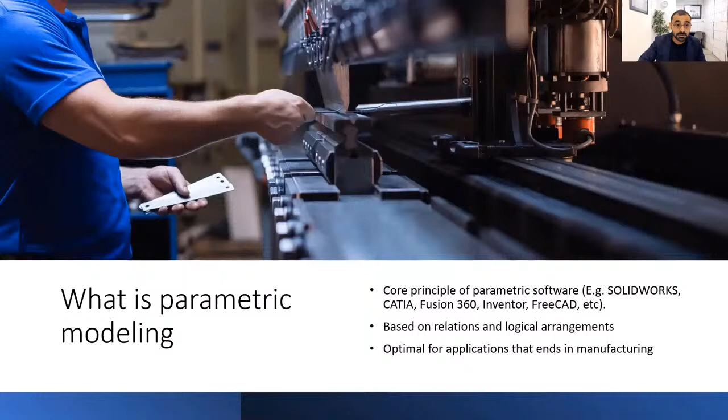And I know in this slide I haven't defined parametric modeling as much, and I find it easier for people to get what that is if we do a mental exercise. So let's do a mental exercise together. You don't need papers, you don't need a computer software, you don't need anything. You can just imagine the situation right here. And this exercise is about a square that will eventually turn into a cube.

We have one in the chat: Rhino 3D is another software with parametric capabilities. Yes, Rhino 3D is also a big software in the field at the moment.

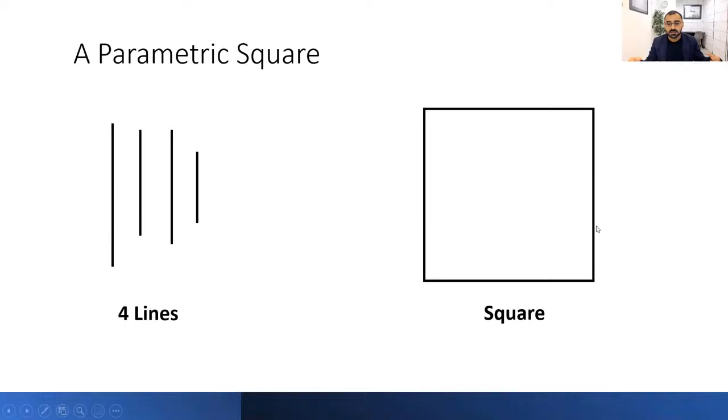So we have 4 lines, and those 4 lines can turn into a square. This is something quite simple, and if we have been fortunate enough to go to school, either elementary school, secondary school or high school, we know that because we did geometry there. However, if you're talking about parametric modeling, especially from a software perspective, there is much more depth into that principle of a square. So let's dig into that a little bit deeper, and we can end up with something that looks like this.

A parametric square is a square defined by parameters. And those parameters are dimensions and geometric relations. So here we have a merged relation between each end of two lines. Those two lines here have a right angle. Those other two lines have equal lengths. Those other two lines have another right angle. Those are all geometric relations. And then we have a specified length as well, in this case 1 millimeter. So this is basically a 1 millimeter square defined by different parameters, which are geometric relations.

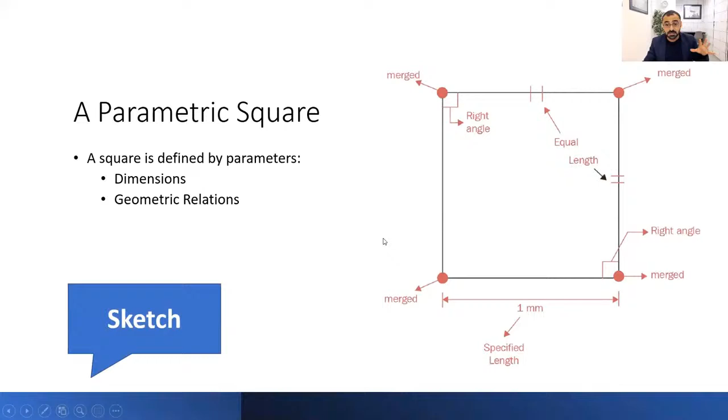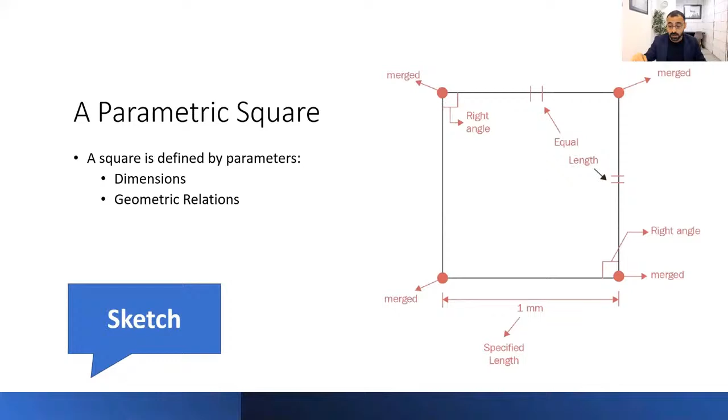If we move one step further, we can turn that square into a parametric cube. But before that, we can call this square a sketch. This is a 2D thing, a parametric sketch of a square. If we take that sketch, flip it on its side, and extrude it upward to a certain length, we end up with a parametric cube. And again, we have another geometric relation here: the length of the extrusion is equal to the length of the side.

Now, again, we are human beings and we're smart. And when I describe that cube, your response might be something like, well, okay, we all know that it is by default a cube. And if you think that, then yes, you are correct.

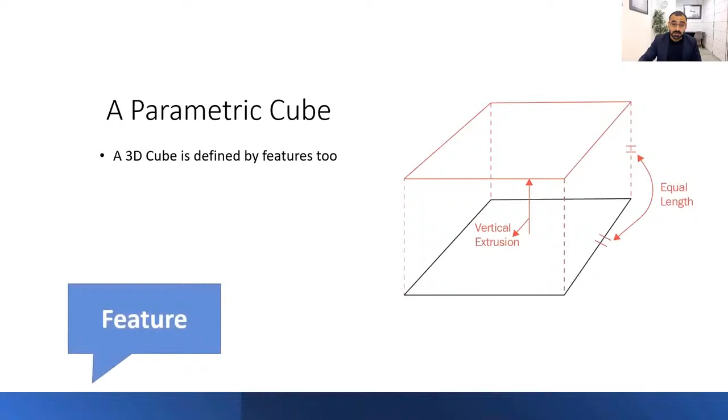However, what we are dealing with, especially when we're doing parametric 3D modeling in a software, is we are talking to a robot. And robots are not very smart to understand what we want or what we mean by shapes, because unfortunately, at least for now, robots didn't go with us to study geometry. This is one of the things, if you're getting started with parametric modeling, keep in mind that you are talking to a robot. And the biggest issue I see with people who are learning, especially starting to learn a parametric modeling software, is they kind of lose the concept that you are talking to a sort of robot.

And because you're talking to a robot, you really need to tell the robot every single parameter you are thinking of. You have two lines. Well, you want those two lines to be parallel to each other, then you have to say that. You want those two lines to be perpendicular to each other, then you have to say that. You want the end of two lines to be merged with each other, then you have to say that. You cannot just assume that by sketching a square or sketching a few lines.

Now, another question at this point would probably be, okay, so we worked hard to define those parameters, and we ended up with a cube. But why should we go over the hassle? I can go to Microsoft Paint, and I can draw a few lines, and I can end up with a cube without having to worry about defining those parameters. Probably going to be in a faster time as well, or I can sketch by hand, and that'll be faster as well.

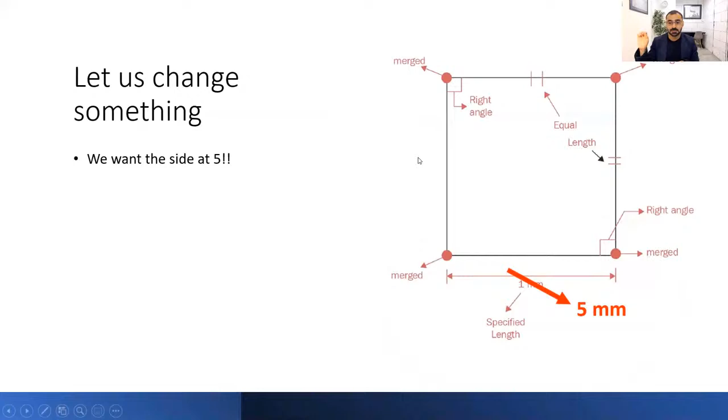However, that's not the case with parametric modeling, because in parametric modeling, we have defined every single relation. We have defined how every single line, how every single point will interact with each other. Then we can simply go back to our original sketch that we did with a 1 millimeter side, and scrap that 1 millimeter, type in 5 millimeter, click enter, and all of a sudden the whole cube changes from a 1 millimeter cube to a 5 millimeter cube.

Now, a cube is a very simple example that we're talking about, but that goes with everything else. So I have this water bottle right here. This water bottle has a diameter for the cap. A lot of times in the design process, you're going to have a diameter of maybe 10 millimeters, and then you're going to realize that, oh no, 10 millimeters may be too small, and then you're going to change it to 11, maybe change it after that to 12, and then change it to 13, and we're going to keep changing every parameter of the design.

Going back to a very fundamental design principle, design is circular. So every product you see around you, if you go to the background of this, there has most likely been a lot of modification in the design itself. You design it with specific parameters, and then you do a little bit of change. You change the height, you change the diameters, you change the thickness, you change everything. And then you keep prototyping and you keep experimenting. And that goes back to a fundamental design principle, which is design is circular.

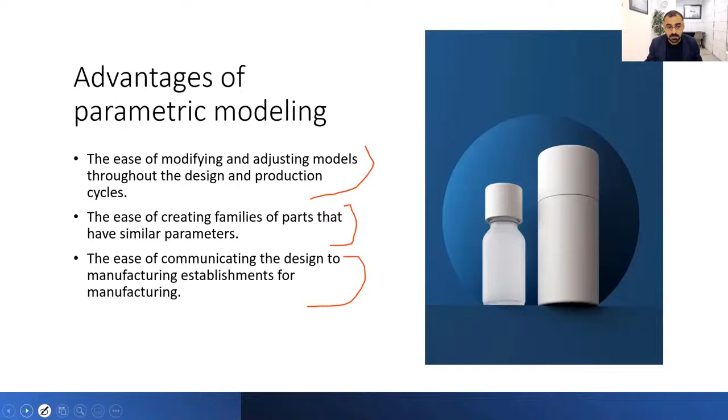So this is about parametric modeling in general. Now let's talk about software. Because parametric modeling made those things easier, software saw a market in this and came to adapt to those needs. So now software has tons of features, especially parametric software, catering to anything involving the actual making of a specific product.

So now you can design a cube, or a table, and assign materials to it. You can easily take that 3D model you made and automatically generate 2D engineering drawings for communication. You can do a lot of design evaluation functions. For example, mass properties - you can design something, assign it a material, and figure out the mass of it.

You can do symmetry analysis. You can do thickness analysis, curvature analysis, and all types of analysis that make it easier to understand what you're designing and the features of your design in real life. If you're doing something more dynamic, you can also calculate the moment of inertia, which is quite important for those particular applications. Another thing software adapted to is simulations.

A lot of parametric software, including SOLIDWORKS, Fusion 360, CATIA, and so on, have a lot of simulation functions as well. Simulations allow you to verify your design before you even prototype it. So for example, I designed this mouse, and I want to verify that if I drop it, it will not break. I design it in the 3D software, then do a virtual drop test using a simulation tool, and figure out if this mouse is likely to break before I even attempt to prototype it.

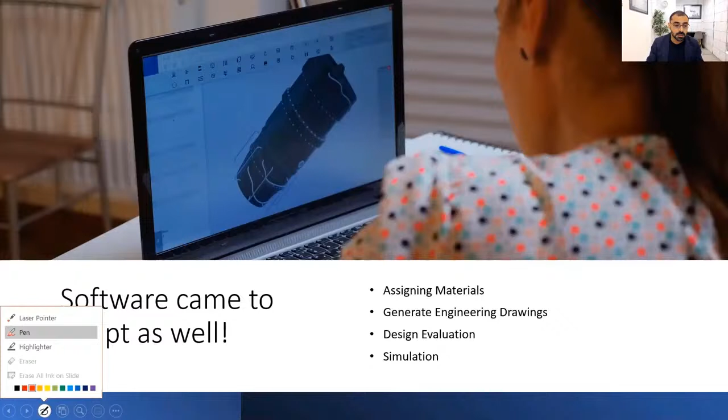That, of course, saves tons of time and tons of money. You're talking some serious savings, because now you can do a lot of things in the virtual environment to supplement your work in the physical environment. So those are how software is coming to adapt as well.

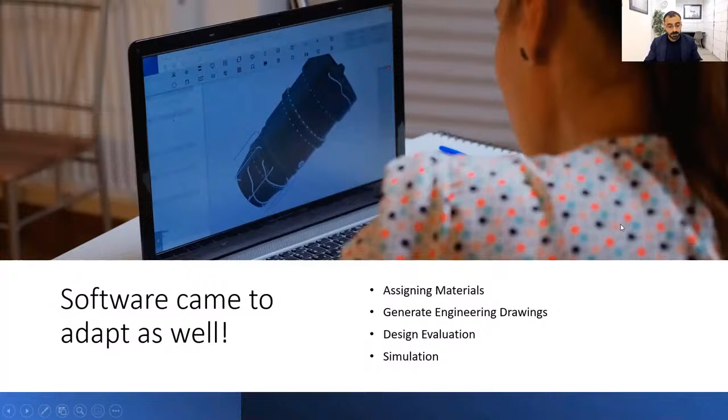Now let's move into SOLIDWORKS. SOLIDWORKS is a textbook example of a 3D CAD software that utilizes a parametric modeling approach. Everything we talked about with parametric modeling and software adaptation is available in SOLIDWORKS. Currently, among professional and business users, SOLIDWORKS is the number one software in that field.

Second to that is, I believe, Fusion 360, based on the last statistics I've seen. It's a very popular software and has become an industry standard in many regions. A lot of manufacturing facilities will accept native SOLIDWORKS files to communicate your design for manufacturing, which isn't as widespread with other software. So that's what SOLIDWORKS is.

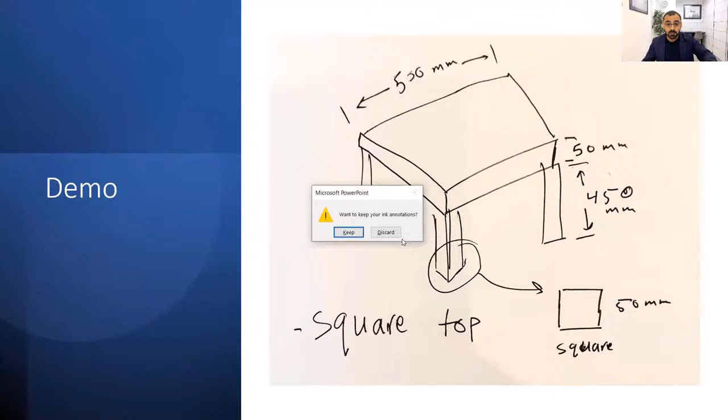Again, we're going to be using SolidWorks, but if you're thinking about other parametric software, it's very likely going to be quite similar. So this is our table. What we're going to do is move into the SolidWorks environment to make it.

This is the SolidWorks environment—this is what you see when you open a SolidWorks file. The first thing you do is go to New and open up a new part. When you go to New, you have a few options: you can do a part, an assembly, or a drawing. We're just going to do our whole table as a part, so I'll click on the part option.

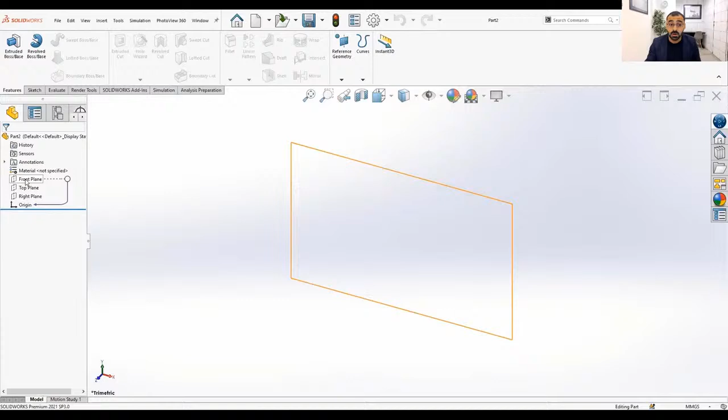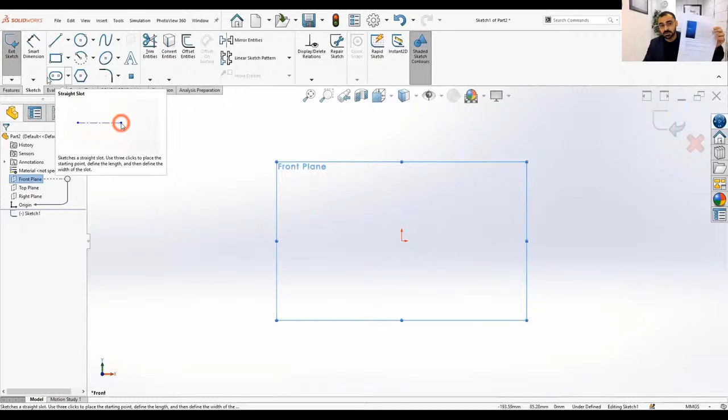First, of course, we need to find a place to put the sketch. So we put the sketch on a plane, because otherwise the canvas we have is kind of an infinite space, or you can think of it that way. So I'll go to my front plane, let's say, and then select sketch, which pops up right there. And now I can sketch. What I'll do is the table I just showed you in the last slide.

The table had a square top, so I'll just draw in a square. So this is a square. Now I'm going to define the parameters of this square. First of all, this side and this side are equal to each other. So I selected them. Now I can add the relation as equal.

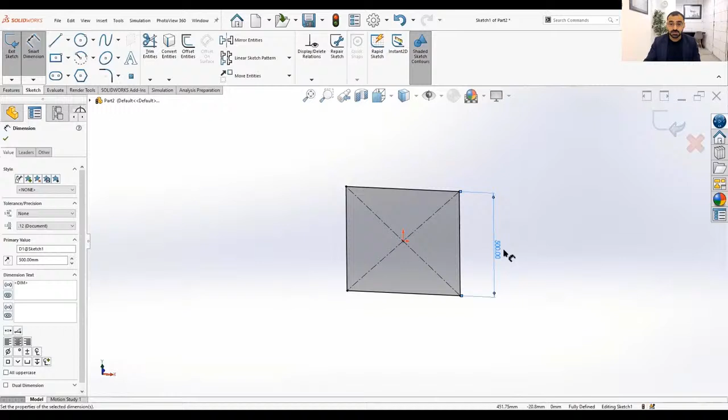And then I can set up another parameter, which is the dimension of that table. So I can go to Smart Dimension and adjust the side, which we have as 500 millimeters. So now we have our sketch, and that is fully defined with the parameters we need. Now I can go to Features. In my case, I'm going to use Extruded Boss. Again, I'm just going to do a quick demo, so I'm not going to spend a lot of time explaining things, because I just want to show you how it looks.

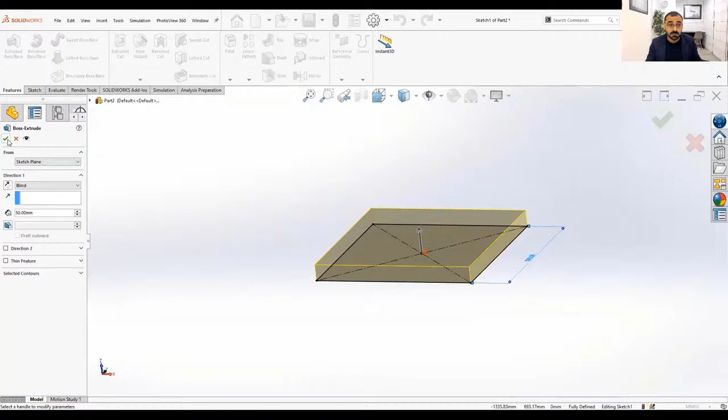And here, in the Feature Property Manager, the so-called Property Managers that pop up with every command, I'm going to set the dimension from 10 millimeters to 50 millimeters, which is the thickness we want for the top of the table. Now we have it visible as a preview in the canvas. Click OK, and we just started the top of the table.

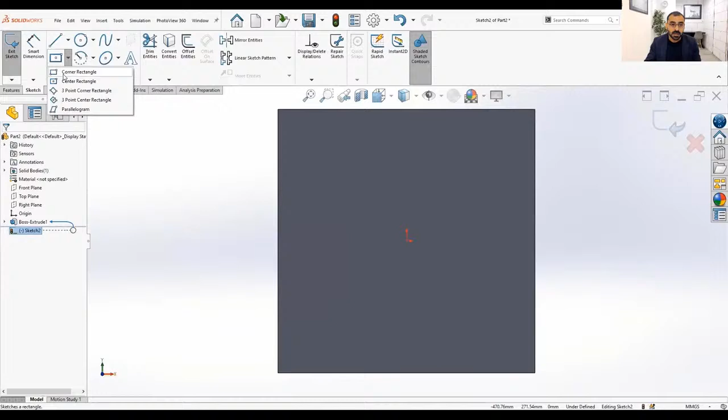Now I can do the legs. To do the legs, I can do the same thing all over again: sketch, and then apply feature. Now I'm going to locate the sketch on this surface right here. And then I will do a leg, which is basically another square. So I'll define the parameters again. The sides are equal to each other, and the thickness of that leg we have is 50 millimeters. So I have one leg.

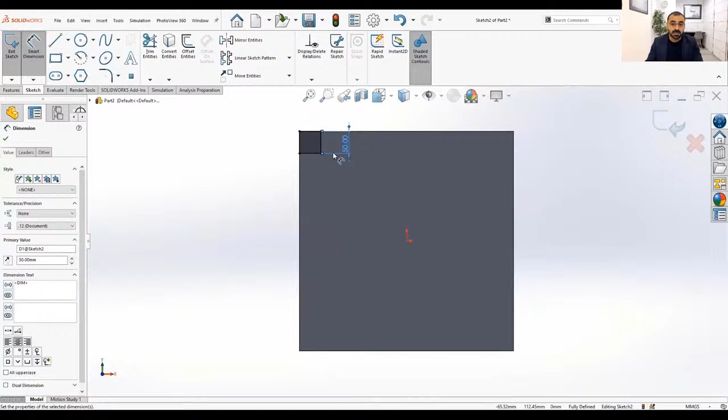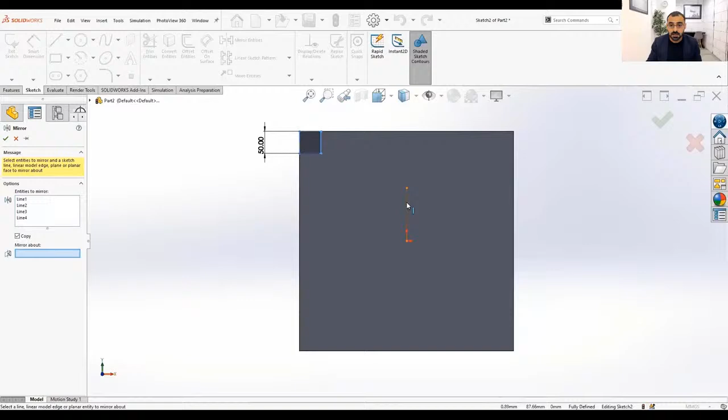Now I want to copy the leg 3 times, so I don't need to recreate it again. And that's an advantage that you get with the parametric approach: you can use a parametric relation to generate the other sketch. So I'm going to have a center line, and then I'm going to mirror the square I just created. So I use the mirror command, select those 4 lines, and mirror them around this line we just created. And here we go. We have another sketch.

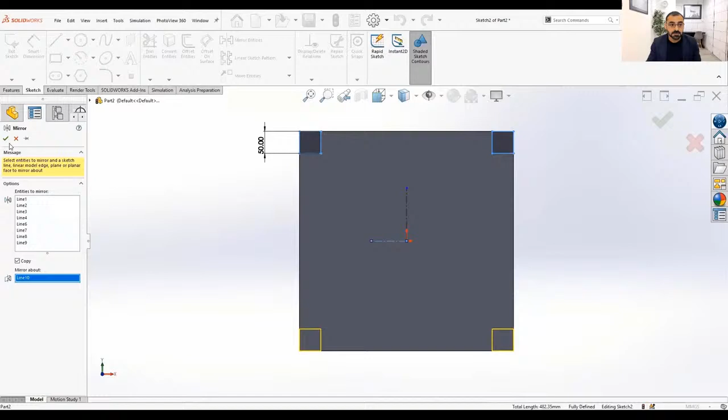And I'm going to do the same thing at the bottom real quick. I'm going to do a center line, and then I'm going to mirror those 2 squares to the bottom. Now I have my sketch. Notice that I only fully defined the first one with the parameters we want, and then I just copied it to the different places.

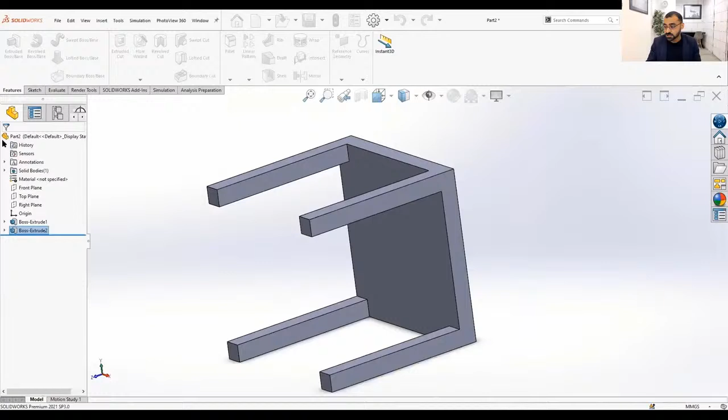And then again, apply a feature, and the leg is 450 millimeters. So that's it for 450. Click on the green check mark, and I have my table.

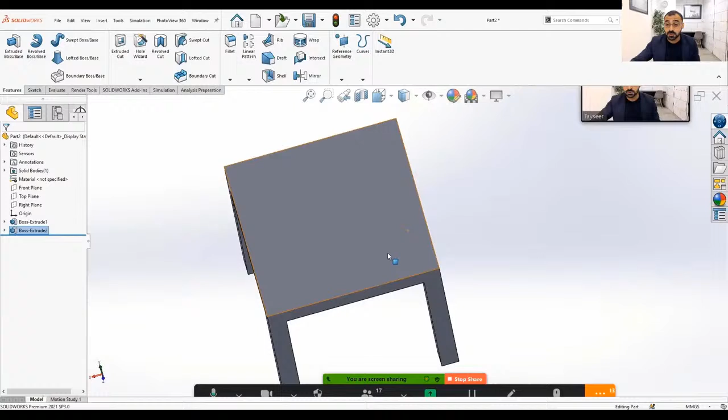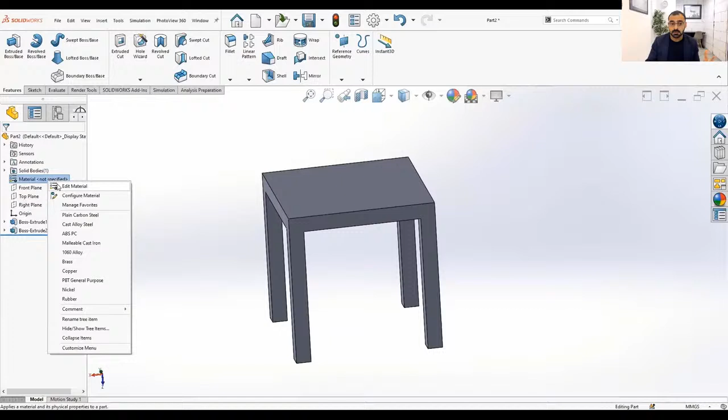Anyways, back to our demo. That's basically it. We just got ourselves a table. Now, there are a number of things that we can do with it as well. Let's say our client goes like, okay, I want to create this table using maple wood. How many kilograms will that be? Well, okay, then I can go to materials. Again, this is part of how softwares adapt to the making of things. So I can go to materials, and then I can assign a specific structural material to this table.

In this case, I want to have it as maple wood. And then I apply that. Now I have a maple wood table. And then I can go to my design evaluation functions, go to mass properties, and I can have the calculated mass of that particular table. So now, before I even prototype it, before I do anything, I know that if I make this table, it's going to weigh about 8,300 grams, which is about 8 kilograms. And that's a relatively heavy little table. And then I can use that finding to formulate design changes to fit my need.

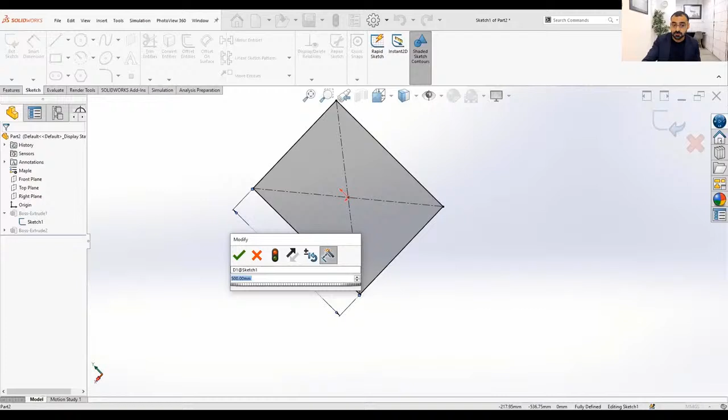So here we go for a demo. Another thing we probably think about all the time is adjustments. So let's say the client all of a sudden goes like, okay, I don't want it to be 500 millimeters. I want it to be a 450 millimeter table. And then adjustments will be quite simple. Just like we did in our mental exercise, we go to the sketch, we edit that original sketch we had. We had 500 millimeters. I can change that to 450. Click on the green check mark. And we have our new table dimension at 450. And if I go to the mass, now the mass of it is 7 kilograms. So now it's like 1 kilogram lighter than before.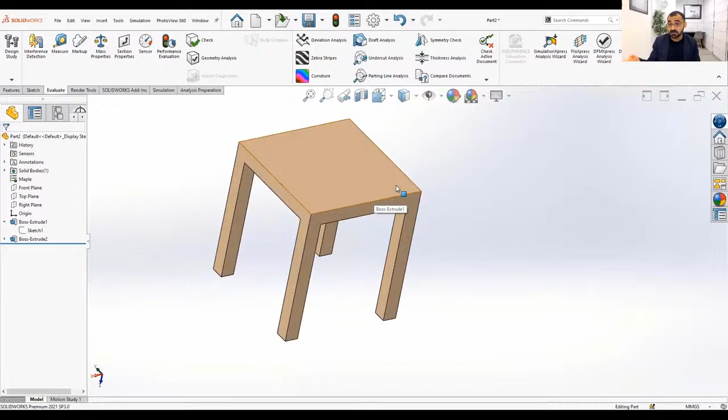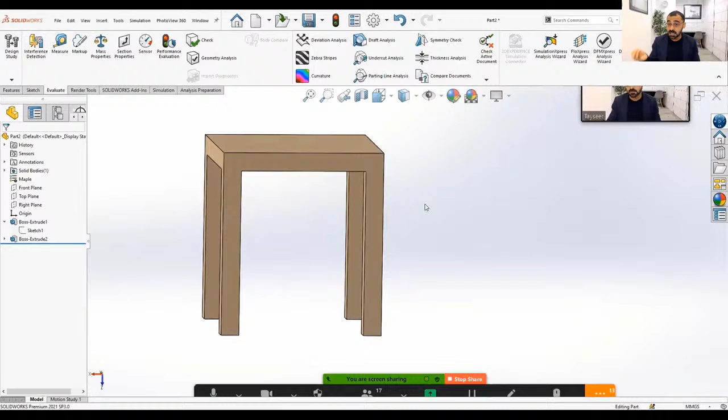However, what I wanted to highlight here is note how once I change the side of the table from 500 to 450, all the legs kept in place. And this is because those legs were set up, were defined using specific parameters. So now I just update the length and everything updates accordingly. If we don't have those parameters, or if we set up those parameters incorrectly, and then we change the table to 450, very likely two of the legs will be shortened out, and then we'll have two legs hanging in the air, which luckily doesn't happen thanks to the parametric approach of a software like SOLIDWORKS. So this is about it for the small demo I wanted to share.

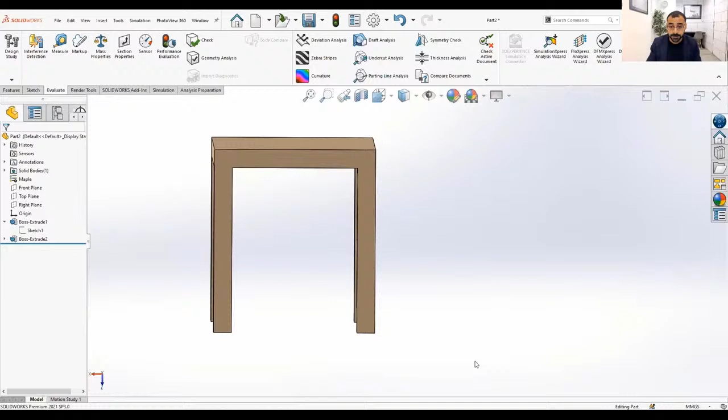And let me go back to my PowerPoint slide because I have other things as well. So just now we did a demo to create this table, and we took probably a bit more than 5 minutes to create it. Again, in the same software, I can easily generate an engineering drawing. So then I take that model I created, put it in the drawing function. If you remember, there was a drawing option, and put that there. And then I can generate a drawing that I can give to a manufacturing facility or give to a person who can make the table for me. So this drawing I'm showing here is a drawing I've created in SOLIDWORKS as well.

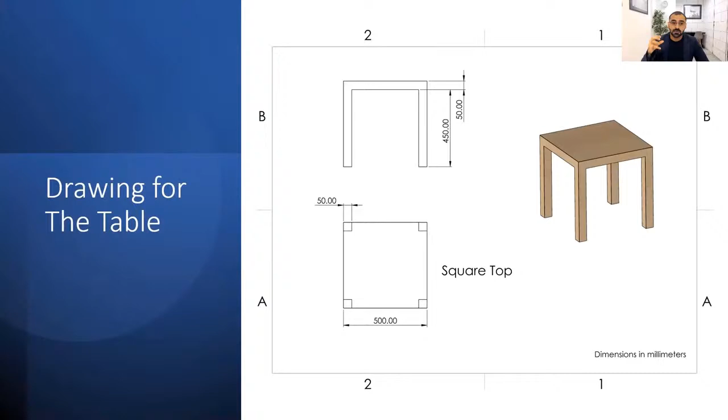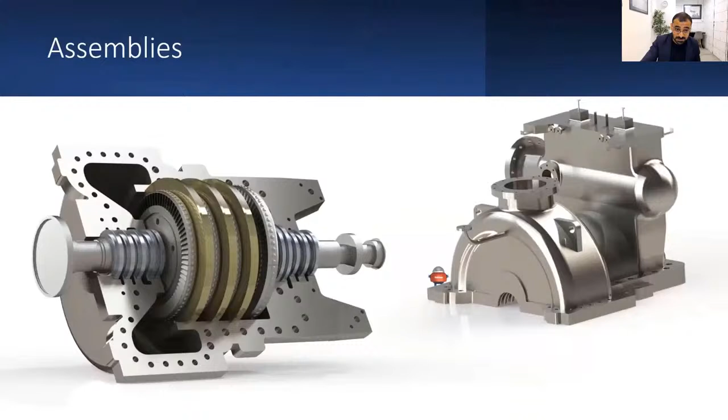This is actually the story behind the school: we noticed that, especially for people who use YouTube, it's a great source. However, some of the resources there are good, a lot are not so good. And if they're good, they're often a little random. So people consume those resources, and at the end of it, they do not really know where they're at. They don't know where they started. They don't know where they're ending. And they do not know what they do not know. And a lot of times when I see models created by people, the parameters are poorly defined. If you use GrabCAD, for example, and download models from there, a lot of the models look beautiful, but the way they're structured is not adherent to the best standards that parametric softwares can provide.

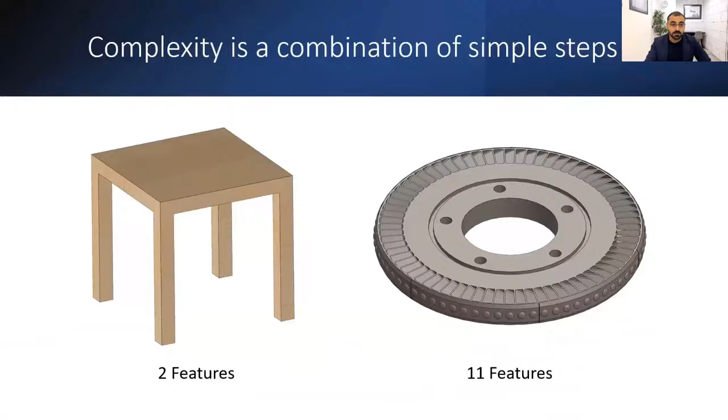Can you suggest an online learning path so that one could get to the professional level, including modeling, simulation, analysis, using SolidWorks specifically? Another question from Bilal. Well, I'm going to be biased in this question. I think you can just join the TforDesign School, and then you can start with the CSWA as your first step. You can jump to the CSWP after that, and then to our simulation course. We do have a simulation package offer as well. So that's a learning path that would be most fitting for most people.

Again, if we go back to the certification graphic, the starting point will be here in the CSWA, perfect if you're just starting, and then CSWP is your second step. The other steps, I would say only jump to them if you are using them. If not, you can just ignore them altogether. Simulations is another path. So you start with CSWA simulation, and then you move into more professional levels.

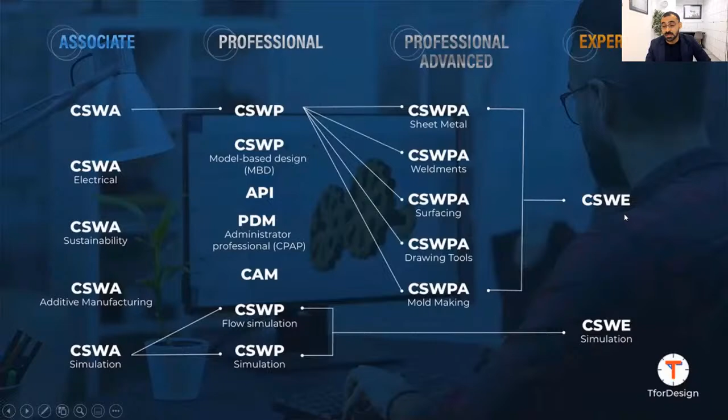However, I would not recommend you start with simulation until you have a professional level ability in the 3D CAD itself, because they do interact with each other. If you're using simulation, you really need to modify your models for simulations. So I hope that answers your question.

Any thoughts on SolidWorks versus Fusion 360? That's a tough question. I wouldn't say I have many thoughts. I think for many people, they do very similar stuff. SolidWorks, for whatever reason, is considered a higher level software compared to Fusion 360. Within hobbyists, for example, Fusion 360 is very common, because you can access a hobby version of it easily compared to SolidWorks. So that's where Fusion 360 resides most of the time.